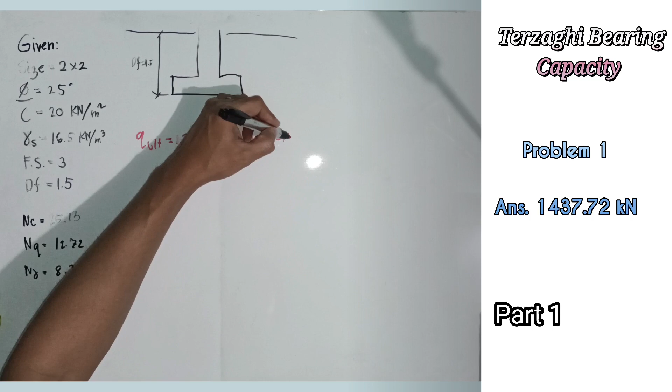What's asked in the problem is square footing, so this is the Q ultimate formula we'll use: Q ultimate = 1.3 C NC + Q NQ + 0.4 gamma B N gamma.

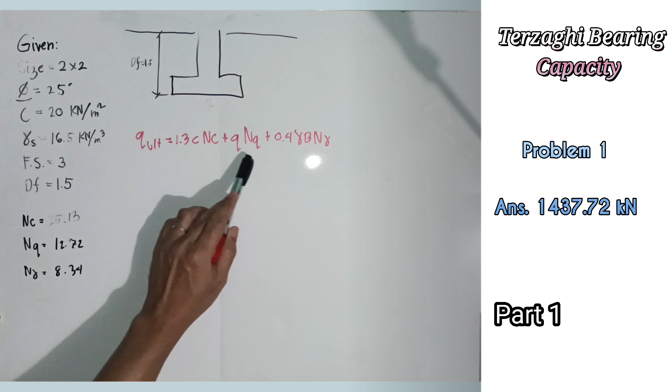Can we compute this now? We have C, we have NC; Q we don't have, NQ we have; gamma B we don't have, N gamma we have. So how do we compute Q? What is Q? Q is the effective surcharge.

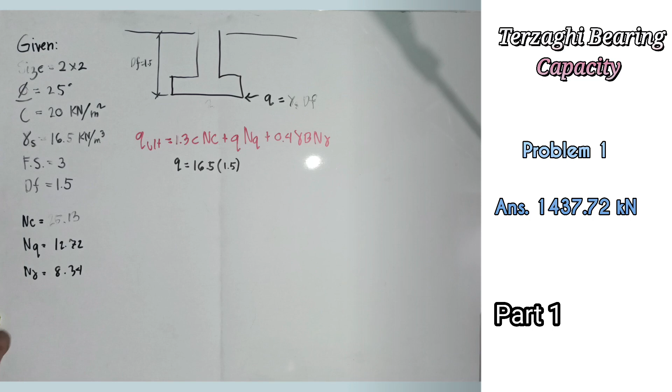So, Q is equal to gamma ng soil, 16.5, then DF, 1.5. So ang gamma B, ang ginagawa ko is sinasabay ko na siya pag-compute. Ito yan, project lang natin guys. Kunyari mahaba yan, gagawin ko hanggang dito lang. Di ba B yan? So B rin to.

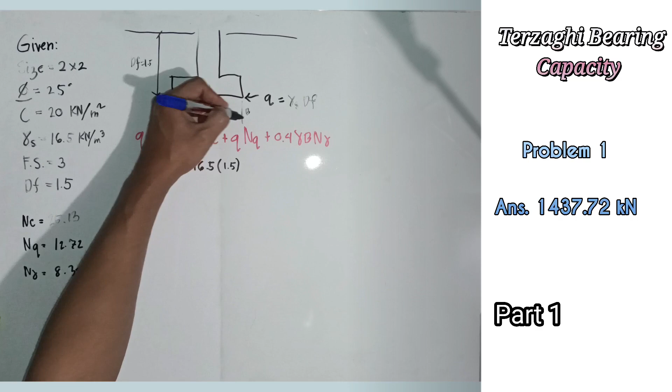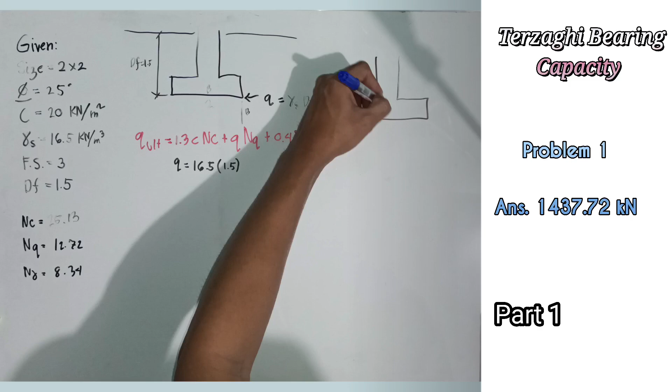Parang ganito lang yan pag malaki. Halimbawa ganyan, di ba B yan? Project lang natin yung base na B. Yan, so B din yan.

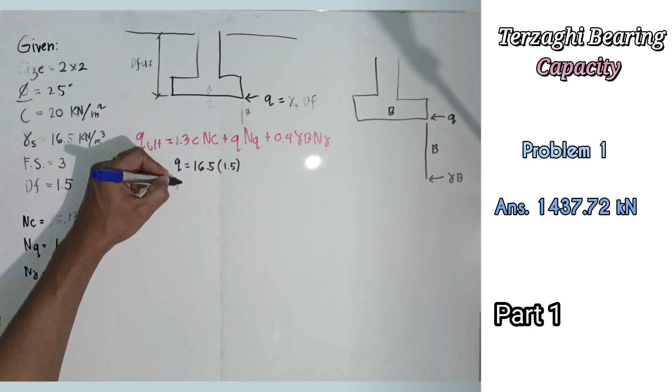So di ba dito yung ating effective surcharge? Ito yung ating magiging gamma B. Bakit? Yan, B, tapos yung gamma ng soil na andito. Sa problem natin, wala namang sinabi na meron tayong water table, so ganyan lang yung ating magiging gamma natin, normal lang. Gamma B is equals to normal 16.5 times yung B natin na 2.

Computing that: 16.5 times 1.5 is equal to 24.75. Then yung gamma B naman is multiply sa 2, so 33. Meron na tayo ng lahat ng pinapahanap.

Substitute na natin: 1.3 C natin is 20 times NC, 25.13, plus Q which is 24.75 times NQ, 12.72 plus 0.4. Gamma B natin is 33 times N gamma, 8.34.

Computing that, calculate niyo din guys kung tama ba yung nakukuha ko: 25.13 plus 24.75 multiplied by 12.72 plus 0.4, 33 multiplied by 8.34. Ang makuha natin is 1078.29 kPa. Huwag makalimutan ang units ha.

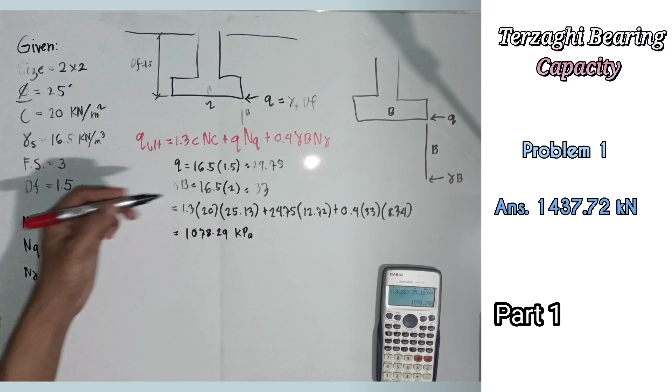Careful guys ha, hindi pa yan yung sagot natin. Q ultimate pa lang yan. Ang pinapahanap is yung P allowable, kaya bago natin makuha yan kailangan muna natin i-compute yung Q allowable muna.

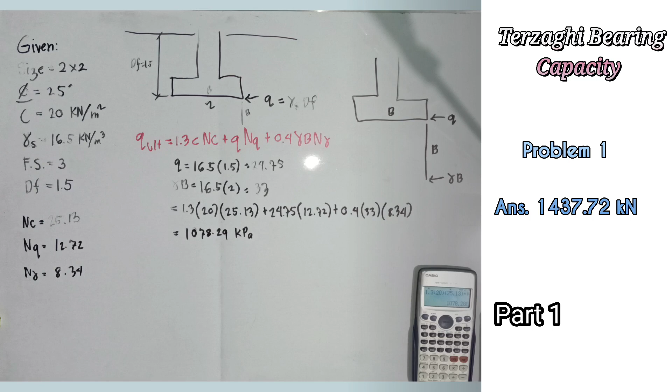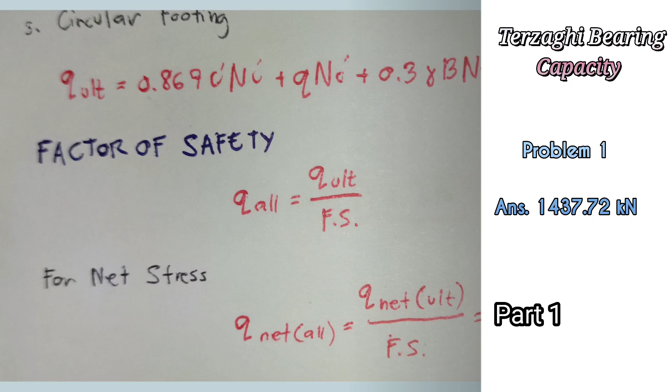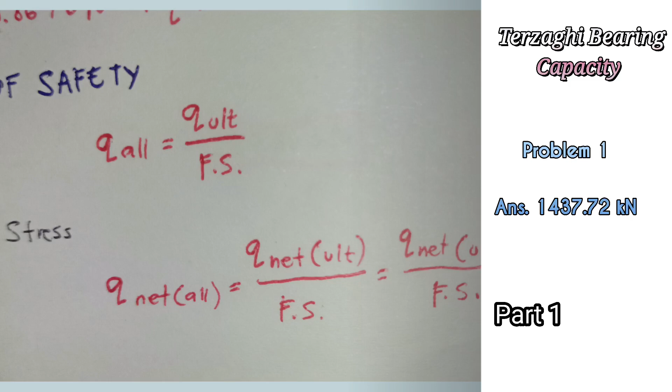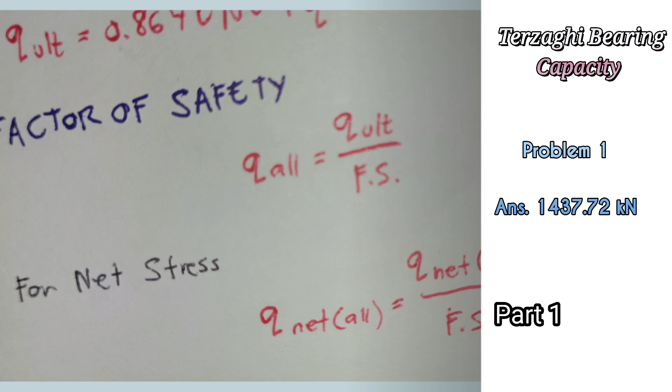Ano nga ba yung formula ng Q allowable? Ito lang guys ha, ang formula ng ating Q allowable is Q ultimate over Fs. Pag ang tinatanong naman is yung Q net allowable, it is equals to Q net or yung ultimate over Fs, equate lang natin, yung Q net natin is equal siya sa Q ultimate minus Q. Pag ang tinatanong is yung net allowable... sorry guys, sinisipon. Yan, so sabi dun, yung Q allow is equals to Q ultimate over Fs.

So Q allowable natin, Q ultimate is 1078.29 over 3. Pag walang given Fs, assume lang kayo lagi guys ng 3, kasi 3 yung ating ginagamit. Computing that: 1078.29 over 3 ay 359.43, kPa ulit yun guys.

Yan, so meron na tayong value ng Q allowable, masasolve na natin yung ating P allowable. Equate lang natin siya sa ating Q allowable. Q allow is equals to yung ating hinahanap na P allowable over yung area. Yung Q allowable natin is 359.43, equate natin sa yung pinapahanap na P allowable over area.

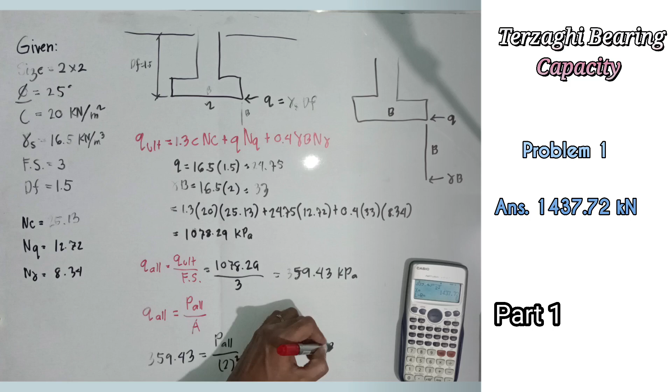Square footing naman yan, so square lang natin, therefore yung P allowable natin is yan: 359.43 equate natin sa P allow over 2 squared. Shift solve, which is 1437.72. Tama, no? Yan yung sagot natin.

Madali lang siya kasi given yung base. So what if sa tanong hindi given yung base? Madali lang yun guys, as long as alam niyo yung concept ng Terzaghi, si paring Terzaghi. Tsaka, what if meron ng involved na water table?

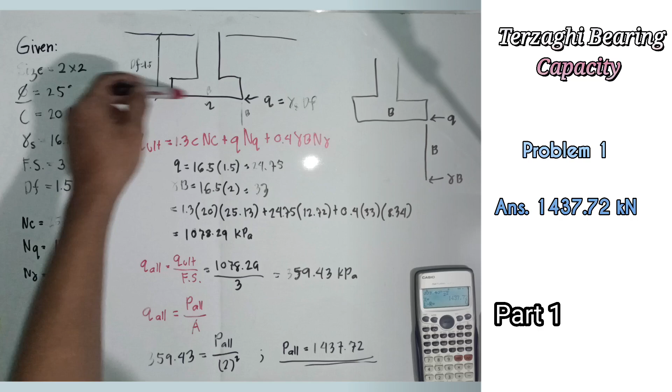May mga case yan: yung case 1, andito yung water table sa taas ng footing. Yung case 2, andito sa line mismo ng footing sa ilalim. Yung case 3, andito sa baba. Try natin mag-solve ng problem na mako-cover yung case 1 to 3. Ito pala yung case 2 natin. Pero pag sample din tayo ng hindi given yung base, para malaman, makita niyo rin kung paano sinusolve which is same lang naman.